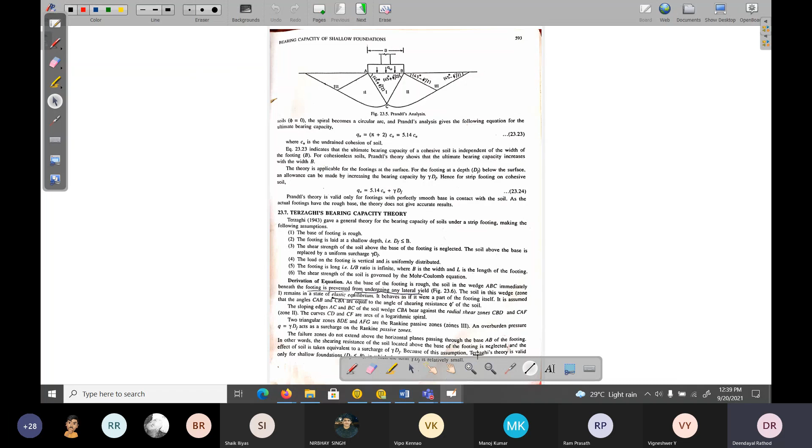So if you recall, we have started this chapter, bearing capacity, and the last class we discussed something about bearing capacity. In today's class, we'll focus on Terzaghi's equation. Visible? May I continue? Yes, sir.

So Terzaghi's bearing capacity equation is very important. These 2-3 days of classes are very important for you. You can expect 4-5 questions from these classes in GATE or any competitive exam. Terzaghi, who is the father of geotech, developed a bearing capacity equation.

This particular theory is valid for a rough footing. The previous one was valid only for footing with a perfectly smooth base, and this is valid for rough. So that's why it is very important. He made the following assumptions. One is the bearing capacity of a soil under strip footing. Strip footing means continuous footing, as opposed to isolated footing.

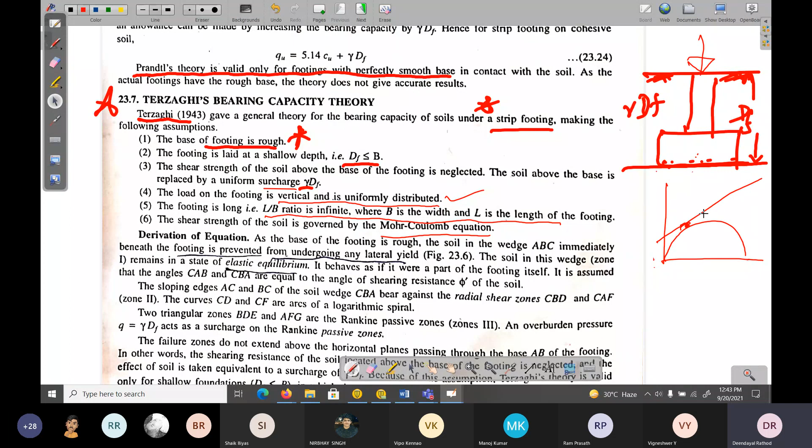The shear strength of the soil is governed by Mohr-Coulomb's law, which we have already studied, with the failure plane and all. It tells us when the soil will fail. So how can we derive these equations? As the base of the footing is rough, the soil in the wedge ABC immediately beneath the footing is prevented from undergoing yielding.

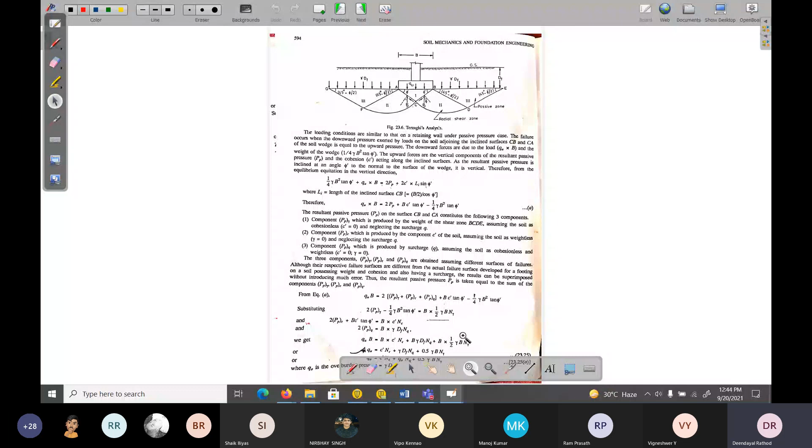Let me go to the next page. This is Terzaghi's bearing capacity. This is B, this is the depth, and this is the surcharge gamma into DF. Terzaghi says for strip footing, only 3 zones are formed when the soil fails. When we apply a load here, 3 zones are formed: 1, 2, 3, on both sides.

He says the soil just below the footing is in elastic equilibrium. This wedge will act as part of the footing itself, and it is in elastic equilibrium. Understand? The second zone is the radial shear zone, where the soil tries to shear, and the third is the passive zone.

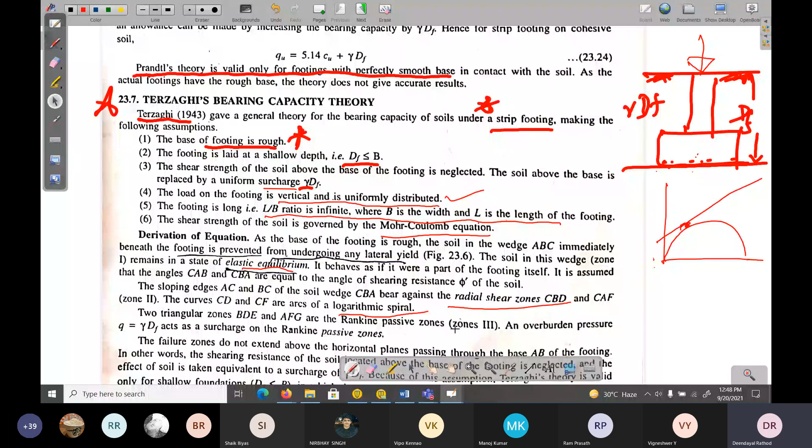Here it is written. Okay, so this is an elastic equilibrium zone, a radial shear zone, and this is a logarithmic spiral. Whatever you see in the radial shear zone would be in a logarithmic spiral. Understand? So now here the loading conditions are similar to that of a retaining wall

under the passive pressure case. Okay, failure occurs when the downward pressure exerted by the load on the soil adjoining the inclined surfaces CB and CA of the soil wedge is equal to the upward pressure. The downward forces are due to Q. This is the load intensity. Okay, load Q into B here. Multiplied with the width, it will be the load. The downward forces are due to the load and the weight of the

wedge. Now what we are doing here is downward force is equal to upward force, like engineering mechanics. Okay, so what are the downward forces here? Intensity multiplied by B plus, as I said, ABC will act as a wedge of the footing. Then we should consider the weight of this particular wedge. How do we consider its weight? Once you know the unit weight and the area or volume, we can find it out, per 1 meter. So that's what is given here.

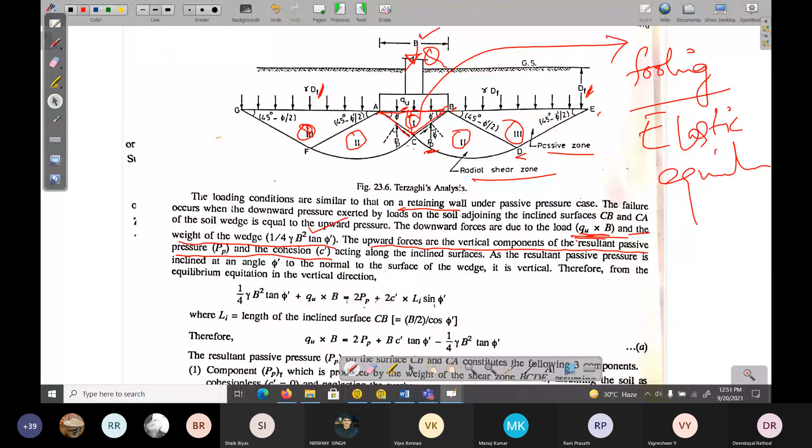That means here this passive force PP is there, right? Its vertical component will act, and this is the cohesion C. Hope you are following. So here this wedge will make angle phi dash or phi, and the passive pressure is PP. And this is C, cohesion along this length. These are the reactive forces.

Understand? First, the intensity, the width B, and the weight of the wedge are all acting downwards. So weight of the wedge plus this would be equal to the reaction. What is that reaction? Passive pressure PP on both sides. Okay, 2 PP plus cohesion on both sides, 2C. This cohesion would be here 2C into Li sin phi.

What is this Li? Li is the length of the inclined surface CB, which is nothing but B by 2 by cos phi. This is the phi we know. So this is 2 PP plus this Li, nothing but the length. We are adding these two, 1 C plus 1 more C, 2C. That's what is given.

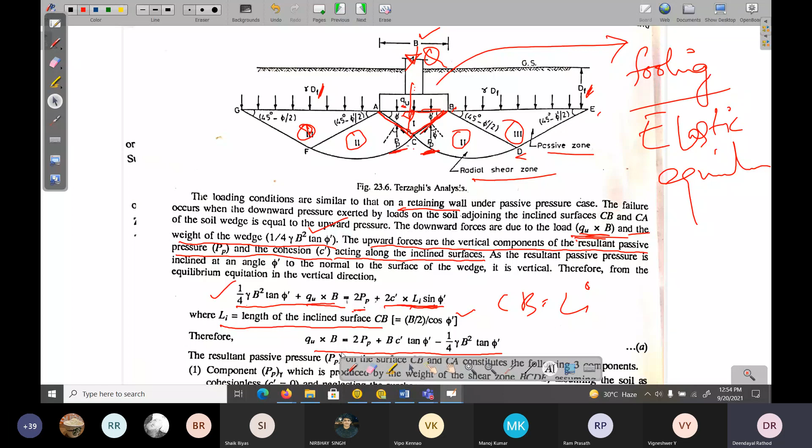Okay, and finally when you simplify it again, you will get this one. Okay, 1 minute. Okay, so what it says.

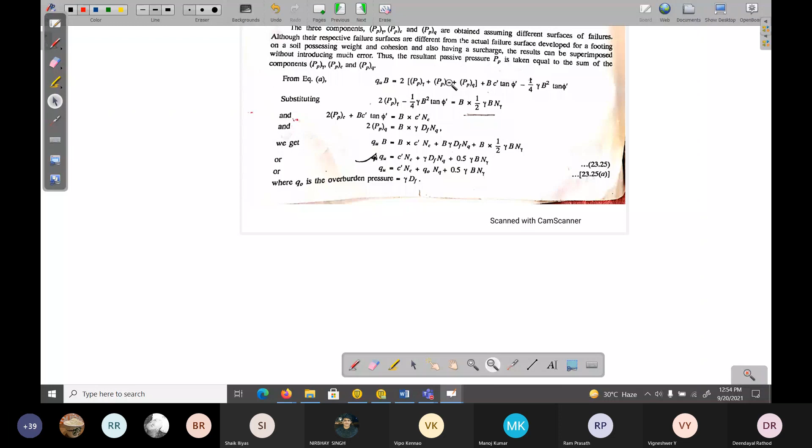What it says: this particular equation becomes this one. Then it says the resultant passive pressure PP that we are assuming on the surfaces CB and CA, on both sides, has three components. Cohesion is one component, only along the length. Some cohesion would be there. Find that particular length on both sides; if you add it, you will get this one.

But the passive pressure depends on three components. Just look here again, I'm zooming in. The gamma component PP, the cohesion component and the surcharge component. The first is produced by the weight of the shear zone BCDE, assuming the soil is cohesionless and neglecting the surcharge. The second is the cohesion component, produced by C dash of the soil, assuming the soil as weightless, gamma equals 0, and neglecting the surcharge. The component PP produced by the surcharge assumes the soil is cohesionless and weightless.

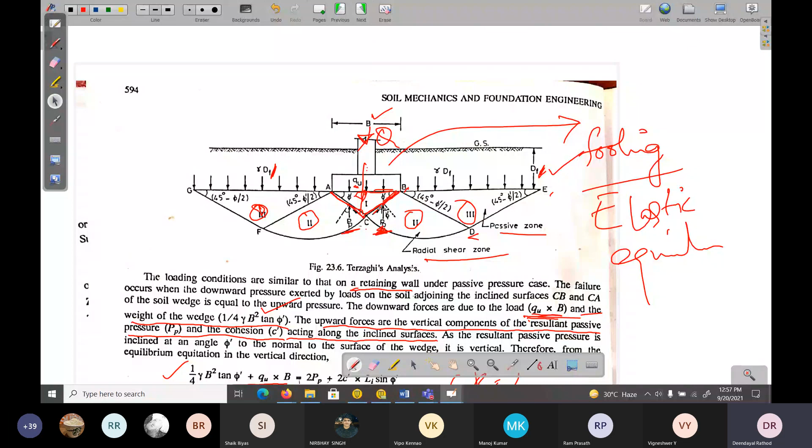So what we are doing here: this passive pressure which is developing a reaction, that reaction would be because of surcharge, or because of unit weight of soil, or because of cohesion. So again it is divided into three components. One is unit weight, produced by the weight of the shear zone. Where is that shear zone? BCDE. This shear zone BCDE. We are talking about PP. There will be some reaction, because of this BCD, and it may be because of the surcharge also, and again it may be because of the cohesion also. That's why it is divided into three parts.

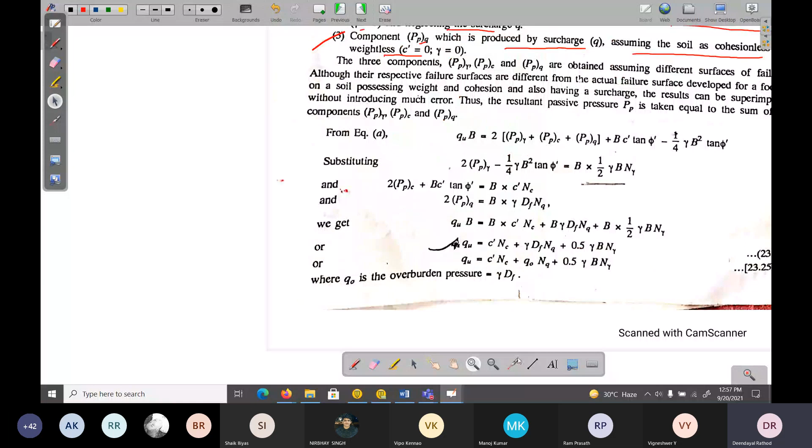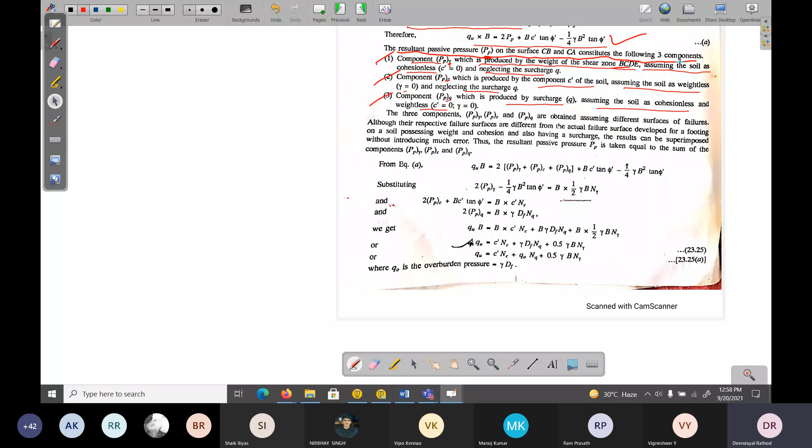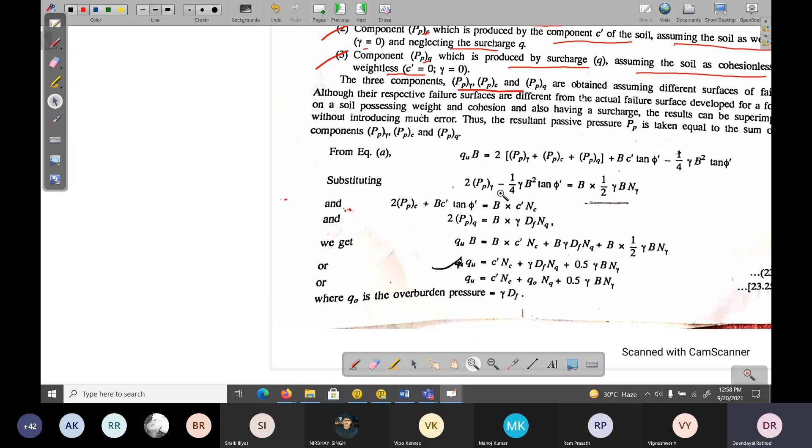So what it says: this component is produced by the weight of the shear zone, assuming the soil as cohesionless, C equal to 0, and neglecting surcharge. The component C is produced by C dash of the soil, assuming the soil is weightless and neglecting the surcharge. And the third component is produced by surcharge. The three components are obtained assuming different surfaces of failure, although their respective failure surfaces are different from the actual failure surface. Thus the resultant passive is taken.

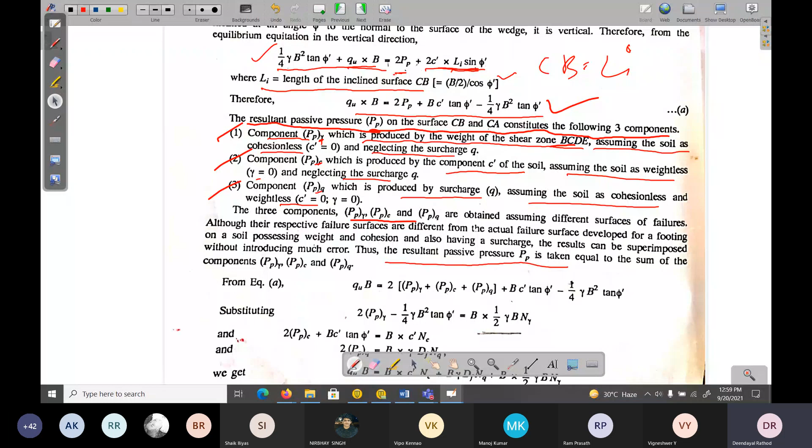Wait, now we are coming to the end. These three components are different. We assume different failure surfaces, although they are different from the actual failure surface. That means with the surcharge it may be different, with cohesionless soil or unit weight it may be different, and the resultant passive PP is taken equal to the sum of the components. Again, we have added all three components. Understand? This is Q into B. This PP has three components, plus the rest is the same.

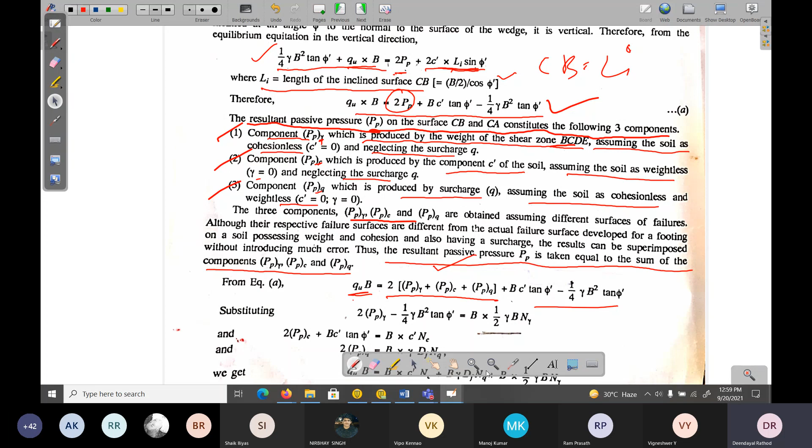Now he has considered three parameters to bring down this equation. This term can be written with N gamma, this term is taken as including NC, and this 2PP he has written including NQ. He has taken three parameters, NC, NQ, N gamma, and derived this equation. We'll see what those NC, NQ, N gamma are. And finally, this is the final equation.

So forget about everything; if you have not followed, remember this equation. This is the bearing capacity equation. Ultimate bearing capacity is equal to C dash NC plus gamma Df NQ plus 0.5 gamma B N gamma. You may ask, sir, how to remember this one? This is one of the very important equations.

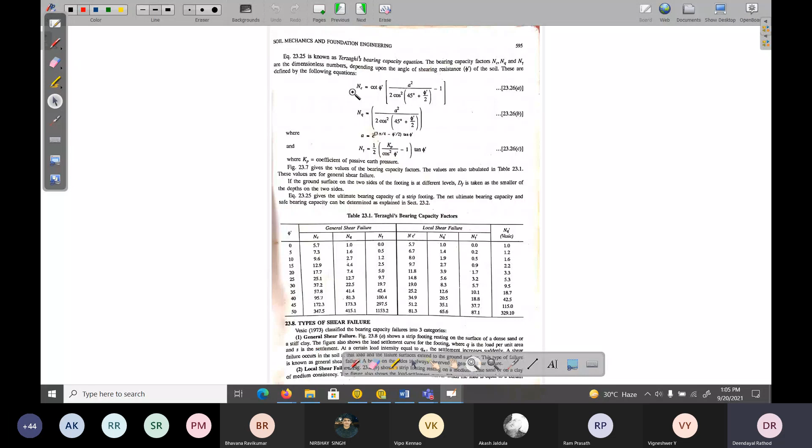Now, what are these Nc, Nq, N gamma? He says Nc is equal to this one, Nq is equal to this one, where A is given, and N gamma is equal to this. The previous equation is called Terzaghi's bearing capacity equation. The bearing capacity factors Nc, Nq, N gamma are dimensionless numbers depending only on the angle of friction. This is asked in many competitive exams. It won't depend on C; it depends only on phi.

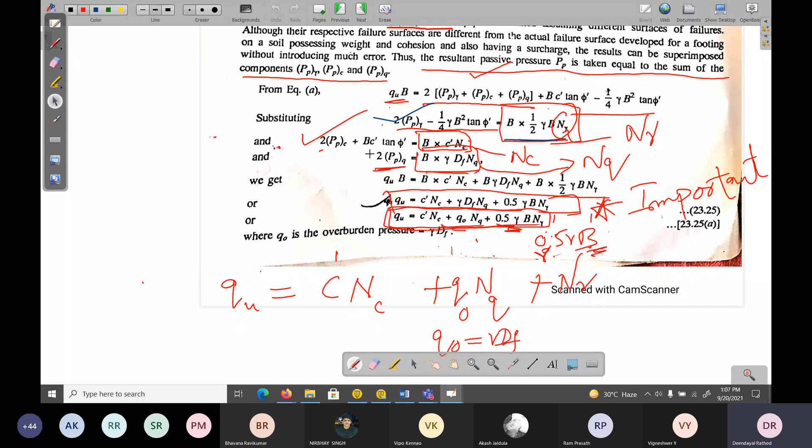If you substitute Nc, Nq, N gamma in the previous equation, you should get this one. He has taken the 3 terms Nc, Nq and N gamma, and he has given their equations. These are very difficult to remember, but he has given a table. Since it depends only on phi, based on phi he has given the table here.

Nc, Nq, N gamma. This is for general shear failure; we'll see general shear failure and local shear failure later. It depends on the phi value. If phi is 0, then Nc is 5.7, Nq is 1 and N gamma will be 0. So what is our ultimate bearing capacity equation? What did you learn in today's class? Terzaghi's ultimate bearing capacity equation, which I will write here again, since it's more important.

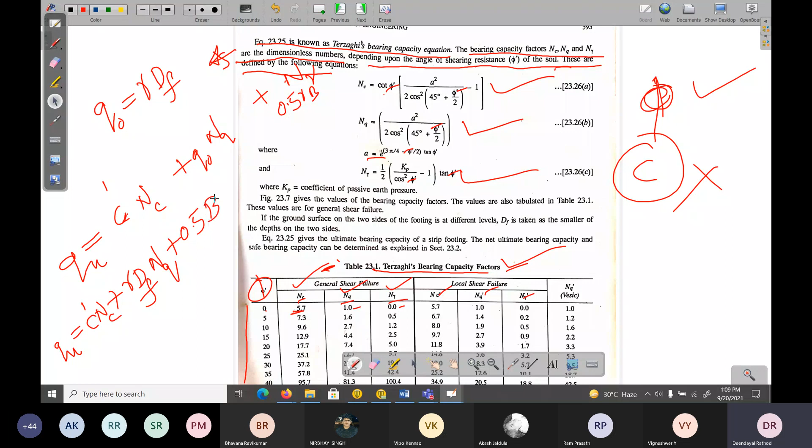First Nc, Nq, N gamma. Nc is the cohesion term, C or C'. This is the surcharge term. What is surcharge? Gamma Df. And the third one is 0.5 gamma B N gamma. So finally the ultimate bearing capacity is C' Nc plus gamma Df Nq plus 0.5 B gamma N gamma. This is Terzaghi's ultimate bearing capacity equation.

Now I'll ask one question to you. For a cohesive soil where phi is equal to 0, how does the equation become? What is the equation for the ultimate bearing capacity?

So there will be gamma DF. For a cohesive soil where phi is equal to 0, what is the ultimate? That means clay soil, purely clay soil, fully clay. What is the equation of this ultimate bearing capacity? NC is how much? For 0, 5.7. So 5.7 C dash plus gamma DF.

What is NQ here? 1. This term would be 0. So what is the equation if I ask you for cohesive soil? This is the equation for cohesive. This is for cohesionless, where the phi term is there. 5.7 C dash plus gamma DF. What happened to NQ? NQ becomes 1. What happened to N gamma? N gamma becomes 0.

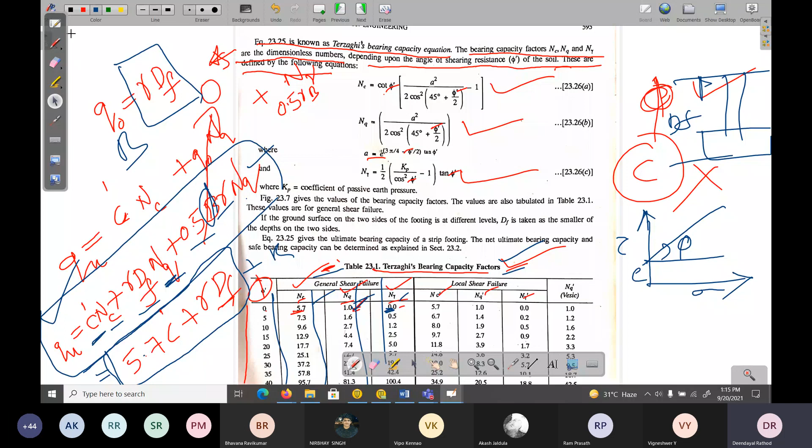So with that, I'll stop today. In the next class, we'll see what is general shear failure and local shear failure. So in this class, just remember that we have derived this particular equation. What is that equation? Terzaghi's bearing capacity equation. Understand?